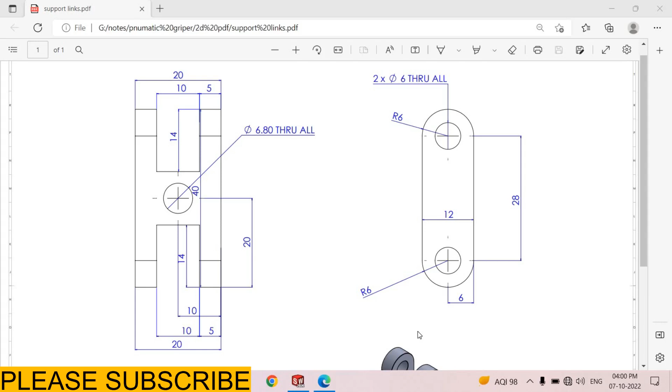In this tutorial, we will create a pneumatic gripper support link. This is the drawing of pneumatic gripper support link.

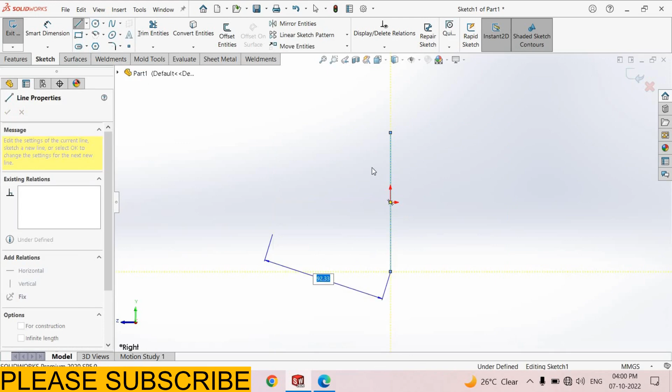First of all, we create this view. For that, I select right plane, sketch, normal. I draw line, midpoint line. Select this point, right click, select option. Select this line, make it vertical. Again select this line, construction geometry.

Smart dimension, 28 mm. Right click, select option. Now we create two circles of diameter 6 mm on both sides, and two more circles with radius 6, meaning radius 6 means diameter 12 mm.

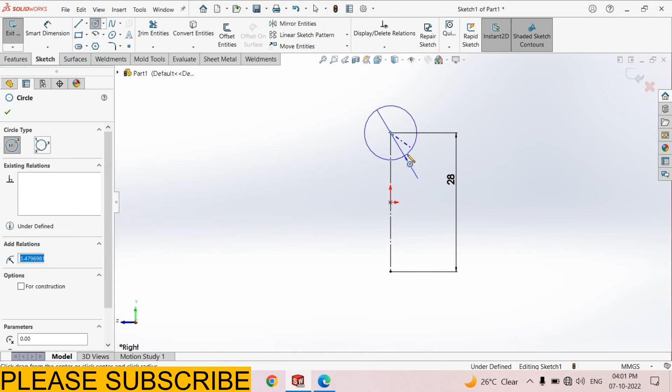I select circle command, draw two circles with same center point on this side. Similarly here, draw two circles at same center point. Right click, select option. Select this circle, press and hold control button, select this circle, make equal. Select this circle and this circle, make equal.

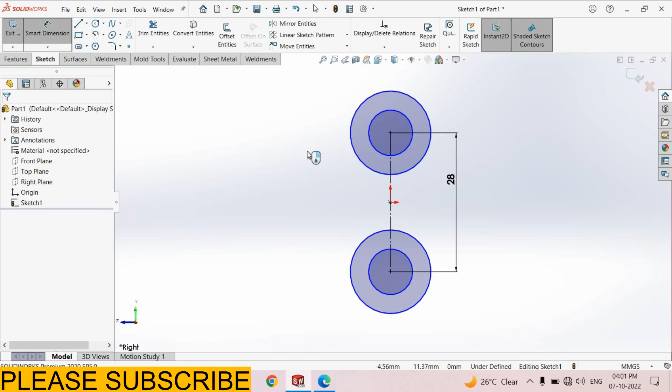Smart dimension, diameter of this circle 6 mm, diameter of outer circle 12. Right click, select option, select line command. Select this quadrant of the circle, this point and this point. Right click, select option. Again select line command, select point and this point.

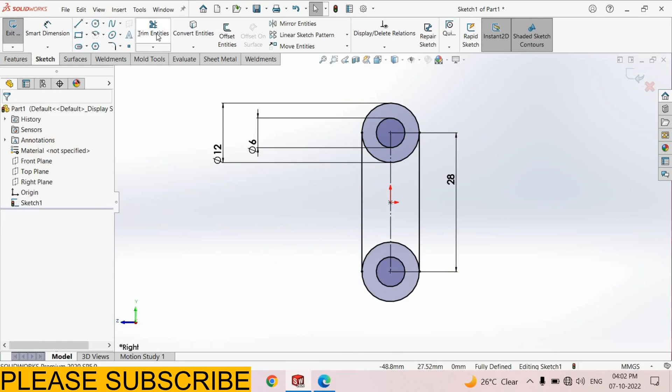Right click, select option. Trim entities. Trim this portion of circle and this portion, similarly this portion and this portion. Right click, select option. Our sketch is fully defined. Come back from the sketch.

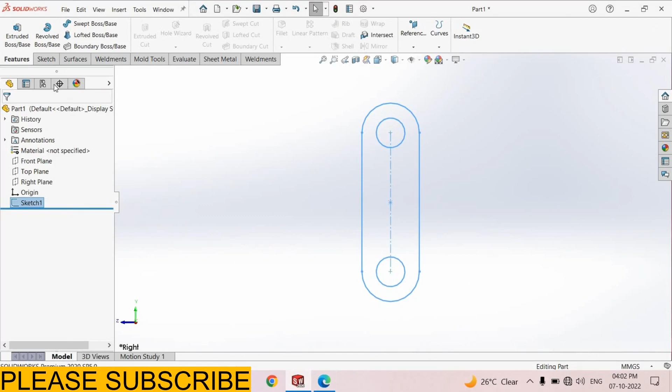Now extrude it up to 20 mm. Go to features, extrude it as boss base feature. Select mid plane, here select 20 mm. Select OK. Now select this face.

Sketch, normal. Now we create two cuts. This side 14 mm, from here to here 10 mm. On this side, distance from here to here, this is 5 mm.

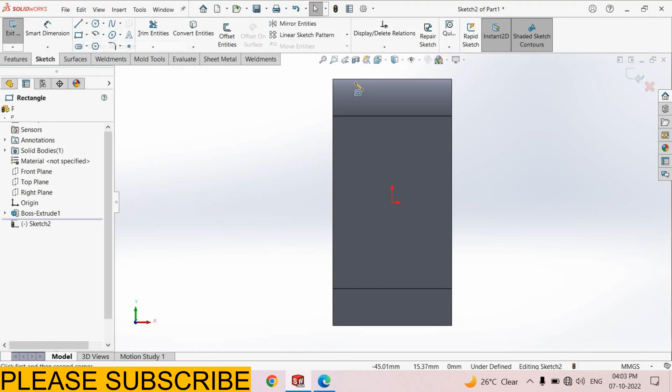I select rectangle, corner rectangle, draw one rectangle here and one rectangle here. Right click, select option. Smart dimension from here to here, 5 mm. Similarly here from here to here, this is also 5 mm. From here to here, the length is 14 mm. This side also 14 mm.

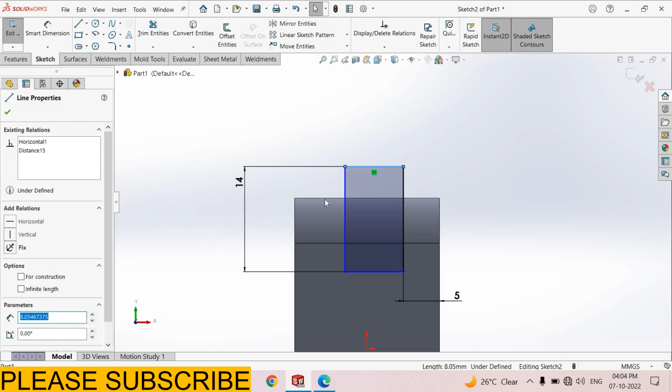Right click, select option. Select this line, press and hold control button, select this edge, make collinear.

On this side, 10 mm. This side also 10 mm. Right click, select option. Come back from the sketch.

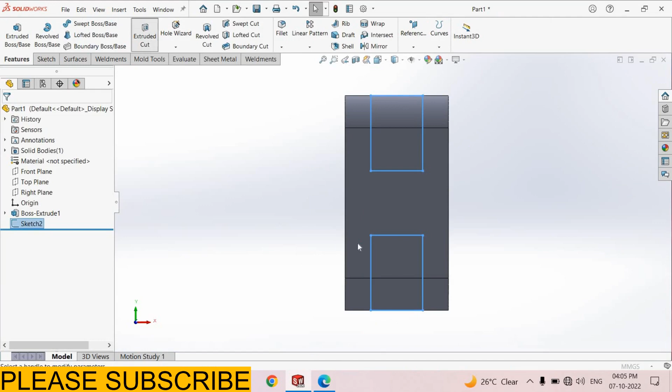Extruded cut, select through all, select OK. Now we create a hole of 6.8 mm diameter through all. The location of this hole from here, this is 20 mm, and from here to here, this is 10 mm.

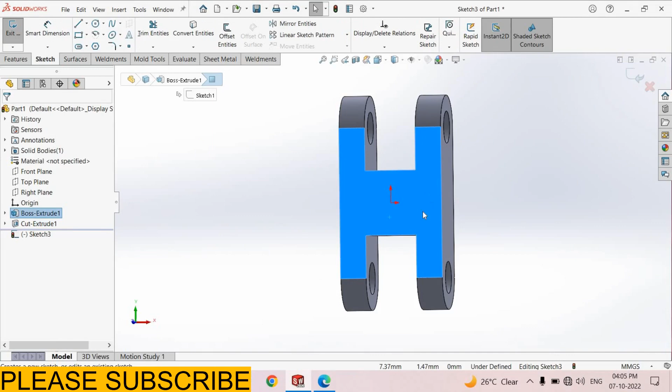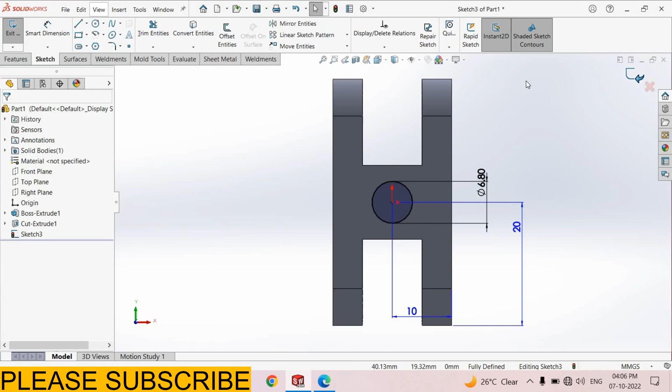I select this face, sketch, normal. I select circle command, draw one circle here, right click, select option, smart dimension 6.8 mm. From here to here, this is 20 mm, and from here to here, this is 10 mm. Right click, select option, come back from the sketch, extruded cut, select through all, select OK.

Now this part is complete. Give it some color. Edit appearance. I select yellow color.